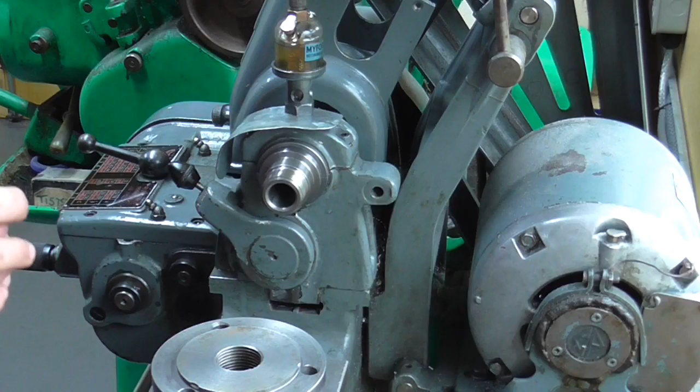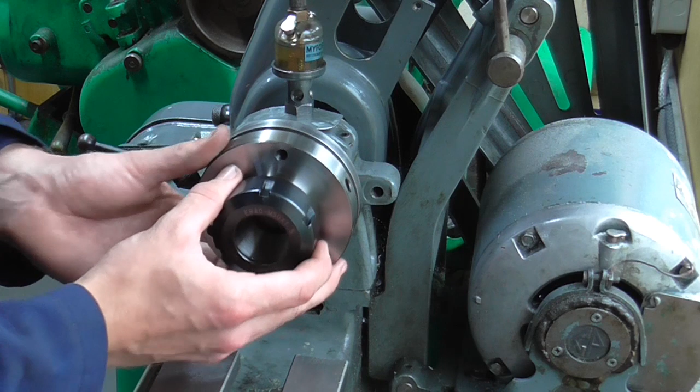So the assembly of this collet chuck is as follows. On the Myford spindle nose we have a thread 1 1/8 by 12 TPI, onto which screws a cast iron backing plate, and onto the backing plate goes the collet chuck, and that is retained in position by means of 3 screws coming from the back into tapped holes.

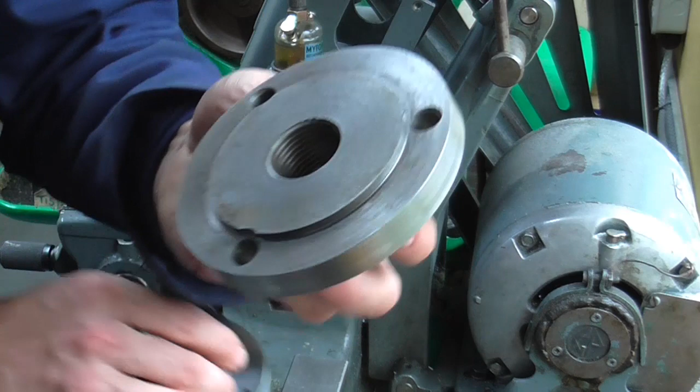Now we need to achieve good radial and axial alignment, not to mention good concentricity, and the best way I can think to do that is to machine the back face and the location diameter in situ. Now this back plate has already had a previous life and it already has a diameter machined on it. It's slightly undersized, so what I'm going to do is just machine it all off and start again.

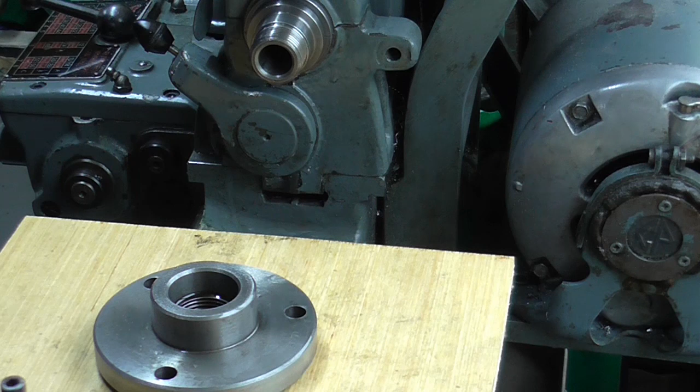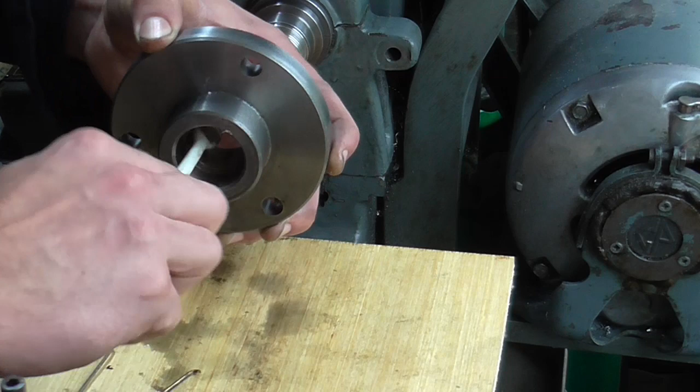To clean this internal thread out, I normally find it useful to use this little device, which is a piece of brazing rod bent up with the 2 ends filed to a sharp corner, so that I can get right into the bottom of the thread form and clean everything out. I just use a toothbrush then, and I'll do this several times, but that'll be the cleaning of that.

And then as far as the external thread goes, I'll just use a toothbrush and some cloth and get it nice and clean. So we're all clean now.

And the reason I've tried to be thorough with that is to give myself the best chance of repeatability going forward. So because I know it was all cleaned at the initial setup, when I come to put it on in the future, I know that if I clean it, it should go back on something like it is now. If it was dirty at this stage and I machine it, then next time I put it on, it's unlikely to go back in the same place.

Okay, so I'm not going to get rid of all of it because it actually gives me a handy guide for what rough size to machine down to. Now I don't want to go too thin here, so I'm just going to take it back 150 thou, which will leave me plenty here for strength.

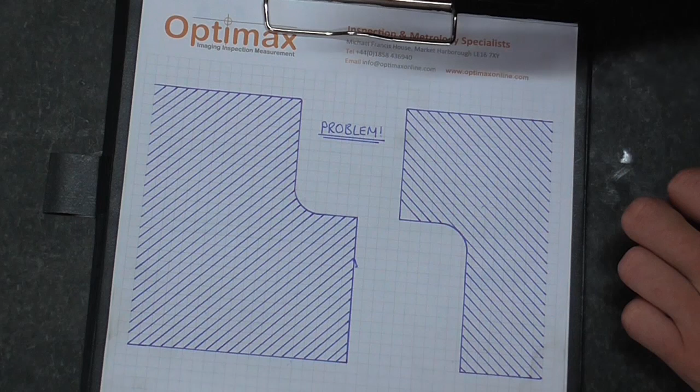Now with mating parts of this style, there is one thing to bear in mind before you end up with a problem. And the problem would be that if these faces tried to mate with these faces, you would have an amount of fouling going on in the corners. So this corner would foul with this radius and this corner would foul with that radius.

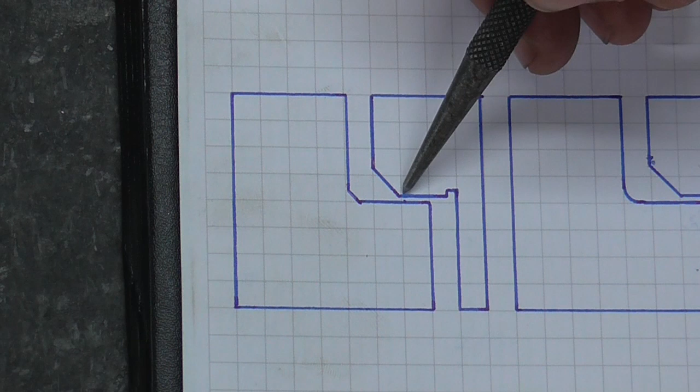Now you do have options, and I've tried to illustrate these somewhat. You could have a small chamfer and a larger chamfer to leave you a gap in the middle when the faces mate. You could have a square corner and a break edge with a radial undercut. You could have a radius and a chamfer, as long as the radius was smaller than the chamfer. You could have a square corner and a break edge with an axial undercut.

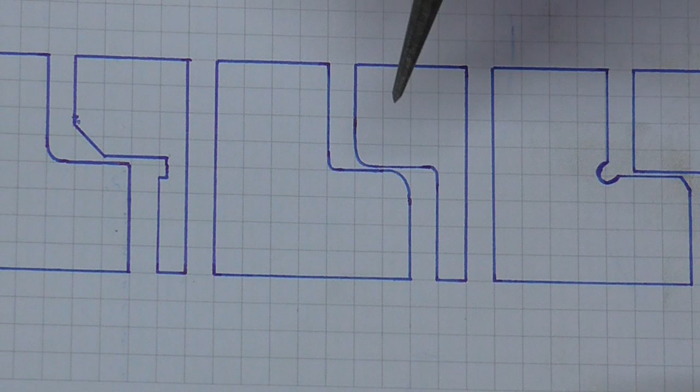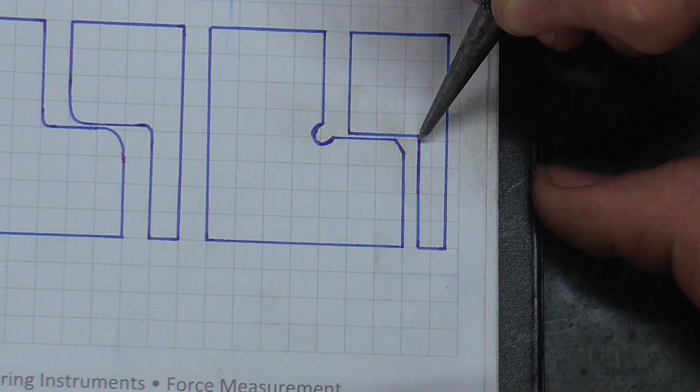You could, in this example, have different size radii, so one small radius against a larger radius and a small radius against a larger radius there, again to leave you with gaps. Or if you wanted to get really technical, you could have a corner relief. Slightly more tricky to do on round components, but still possible, or just something simple like a squarish corner and a chamfer. Most of the time these kind of things are going to be down to your available tools. For instance, what size corner radius you can have is quite often going to be down to what inserts or tools you can grind.

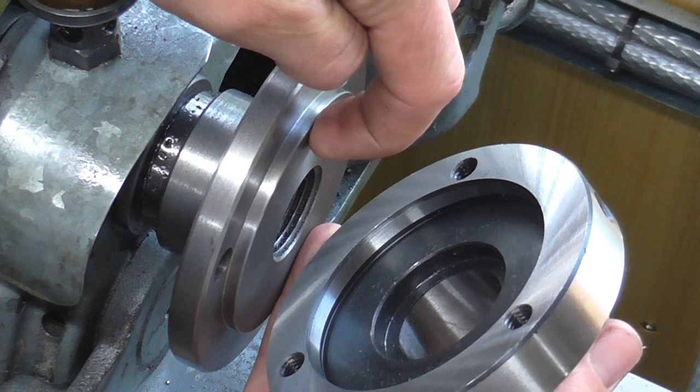But it's worth thinking about, and it's worth trying to design out, because some of these foulings may be very slight and not noticeable during inspection. So the problem's been solved in this case by having a tool radius on this side that is smaller than the chamfer, and on the front side, although there's a break edge, it doesn't really matter because this surface isn't going to come anywhere near that surface.

So I'm going to assemble this now using these little screws, and you'll notice they have a thinner head than the traditional cap screw. Because I don't need a huge amount of strength in this application, I've opted for the thinner head just because there's less for it to catch on as it spins round.

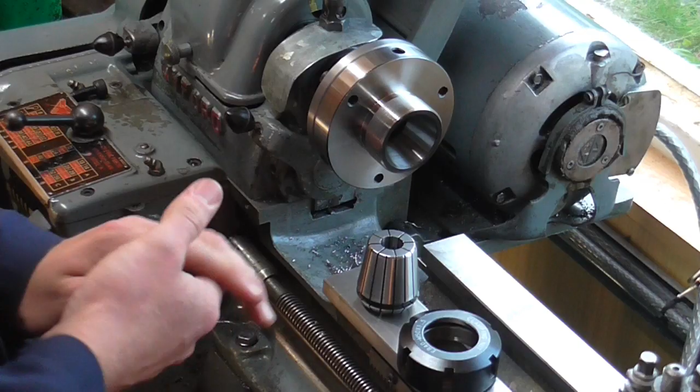So on to assembly and inspection. I've already cleaned everything, and these, by the way, are ER40 collets, and as with any ER collet, the collet goes into the nut and then the whole lot goes into the taper.

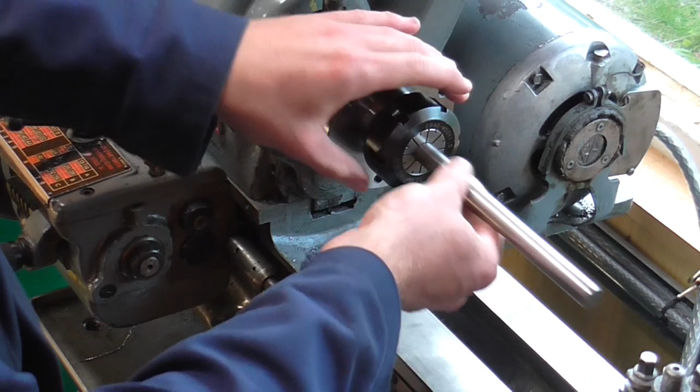And to inspect this setup, I'm just going to use a piece of silver steel, or drill rod as our American friends like to call it. And the whole lot tightens up there with the aid of a C-spanner.

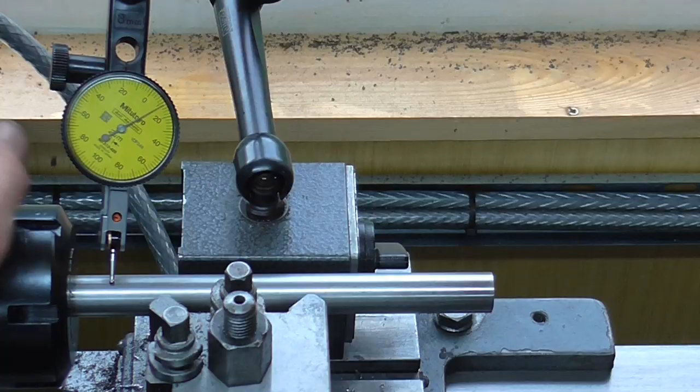And we can now get a verdict. So this being a 2 micron clock, we've got about 0 to plus 16, plus 18, so about 16 to 18 microns run out. The actual numbers don't matter here, it's the difference between them. Now as we go down longitudinally, it's not bad, but that could also be down to headstock alignment. It's more the radial run out I'm interested in, and down here we've got about 0 to minus 12, 14, so I'm happy with that.

So that's how it's come out. Now as for my discussion topic, would it have been better to do the following? What if I had machined the location diameter undersized slightly to give me enough play to fully clock this in, and then once clocked in I could remove it and put 3 dowels in the back so it wouldn't go anywhere? Or what if I had machined this counterbore deeper so I could make the boss inside longer to give me enough room to put 4 grub screws in through the sides, and give me almost like a 4-jaw motion where I could clock it in and be radially supported?

I'm not sure. For the intents and purposes of this machine, 18 microns is fine. And not to mention, of course, that this is a screw-on spindle fitting, which I doubt has quite the same repeatability as any of the tapered fittings anyway. So any thoughts on that would be interesting.

Now just before I go, a quick word on collets. I mentioned there I was using ER40 collets, and that's primarily because somebody gave me them, but why ER40 collets over any of the other type of collets I might have?

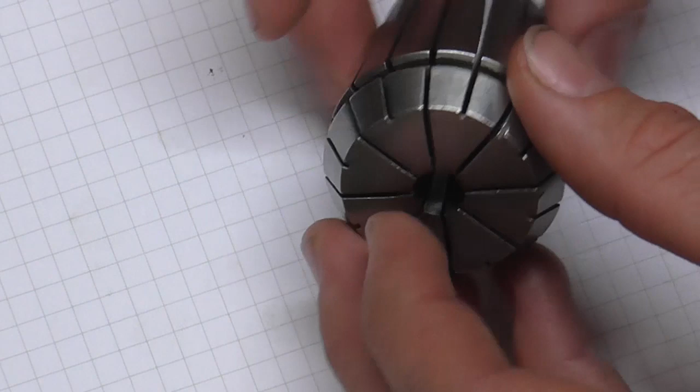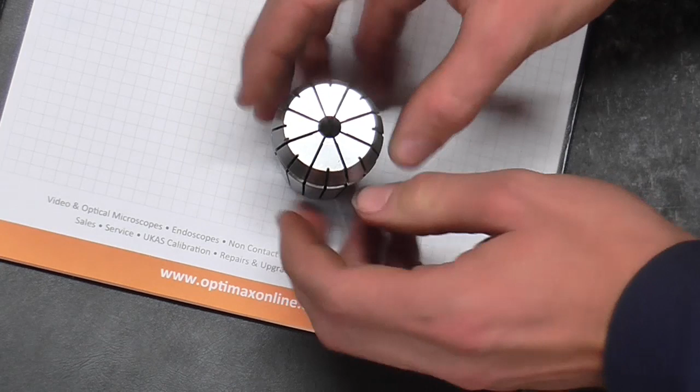And the answer to that is that an ER collet has 2 opposing angles and is split from both ends. And that means that as you squeeze it, the bore remains parallel. So this collet, for instance, will hold any parallel diameter within a 1mm range. And with a set of them, I can hold any diameter from 3mm to 25mm. Now that's handy for work holding, because you aren't always dealing with a round number.

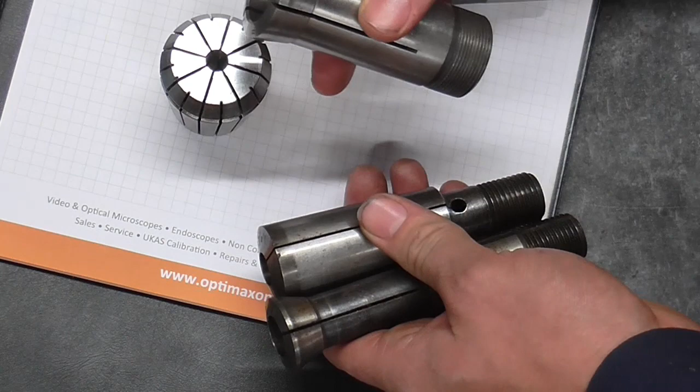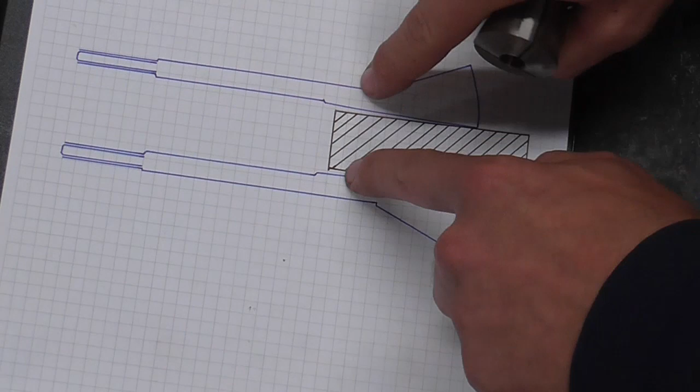These traditional collets, say a couple of Deckel collets there, a 5C collet, a Bridgeport collet here, they are all what I would call more of a nominal size collet, where they're very good at holding a particular size, but it needs to be pretty near that particular size for them to work. Any bigger and you struggle to fit the piece in at all, any smaller and you end up with the situation I've got in this drawing here, where the front of the collet ends up gripping a lot harder than the back, and this could give you an amount of waggling in the worst case, or even in the best case it might hold the part but give you varying or unexplainable results.

So that's why the ER collet has been chosen this time. Also they're quite short, which means you don't have too much stick out from the spindle. They're by no means the only work holding collet, but quite a handy one.